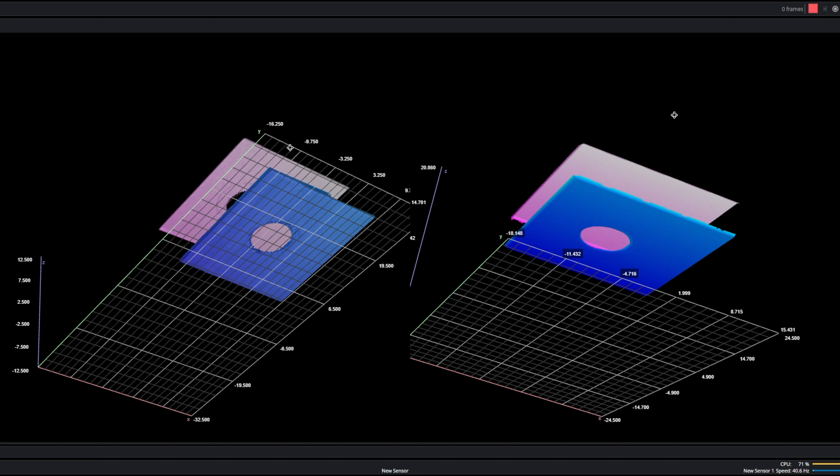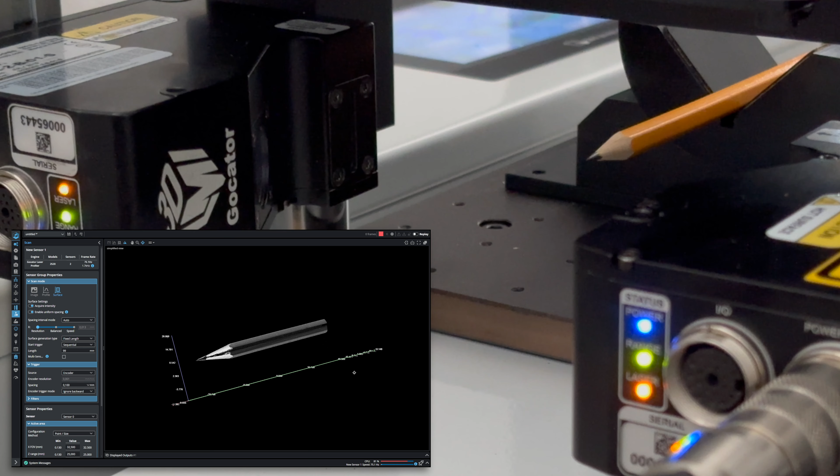In this video, we will explore the process of aligning two opposing Gocator laser line sensors in GoPxL. In an opposite layout, we have two sensors facing each other. When their measurement ranges intersect, we can effectively scan an object placed between them. This setup is commonly used for measuring sample thickness.

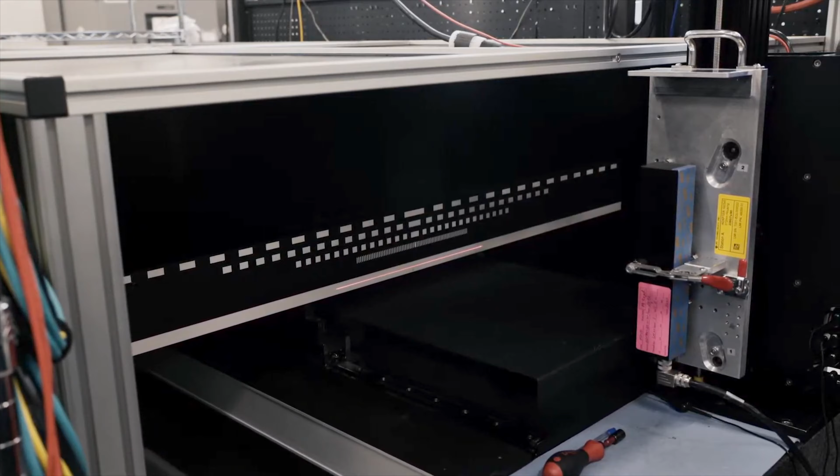It's worth mentioning that LMI Gocators come already calibrated from the factory, meaning users don't need to worry about calibrating them themselves. But when you are using more than one sensor, making sure they are aligned properly becomes really important. Essentially, alignment ensures that each sensor knows the precise position of the others. This way their individual scan data can be combined. I will demonstrate how to align two sensors using the moving bar alignment procedure.

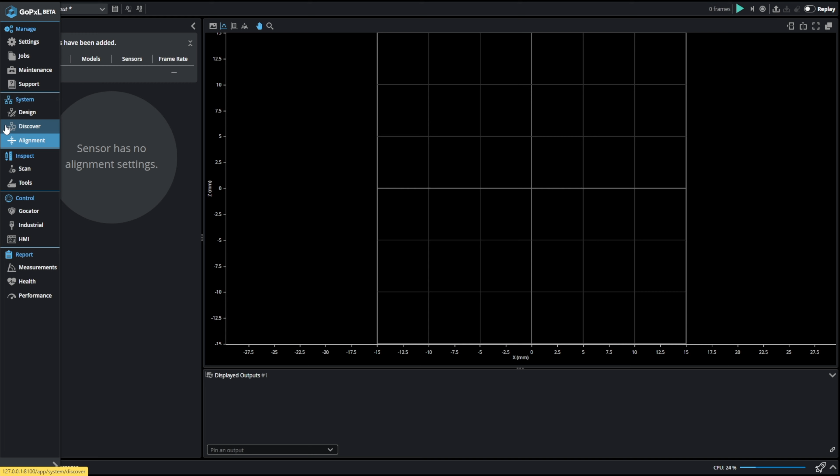Our first step is to add the two sensors to this GoPxL instance. When we click the Discover button, we can see that two sensors are available. If we click the Design button, we can add the two sensors by checking the checkboxes over here. Also, we want to be able to manage the sensor group layout, so I'm going to enable this one.

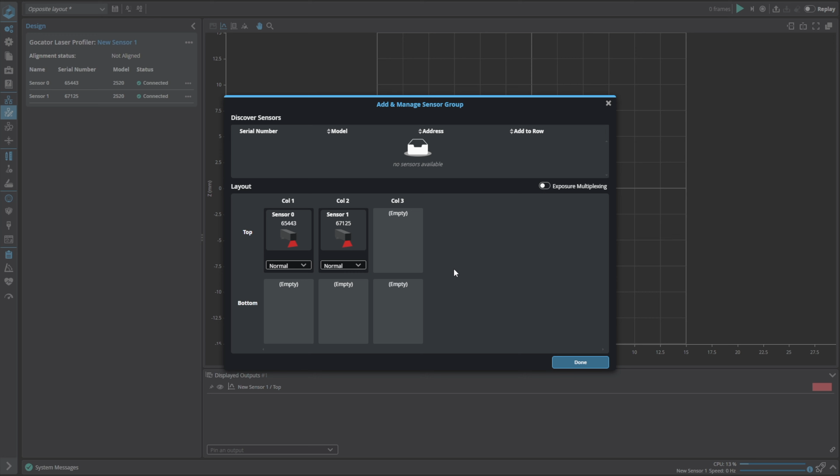By default, the sensors are set in wide mode. We want to have opposite mode. We can simply do this by dragging this sensor to the bottom row. Now simply press Done.

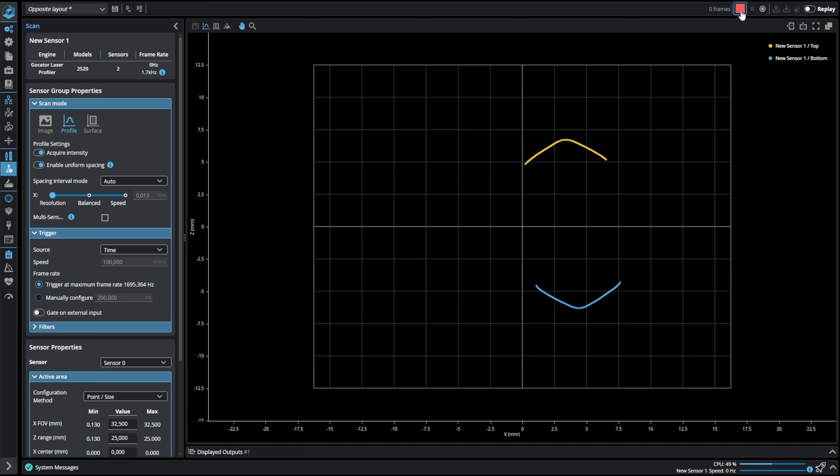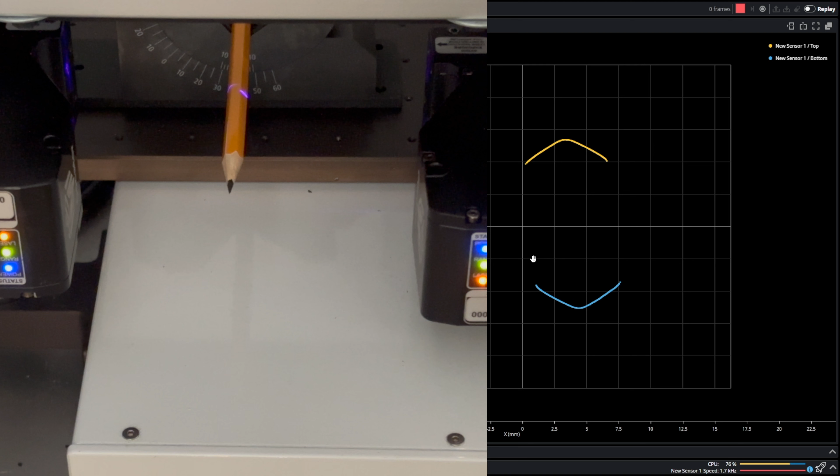Let's now make a simple profile scan of a pencil. Keep in mind that the alignment is not done yet. The colors indicate the different sensors. As you can clearly see, the gap between the profile lines is currently incorrect. Also, there seems to be a slight misalignment in X direction.

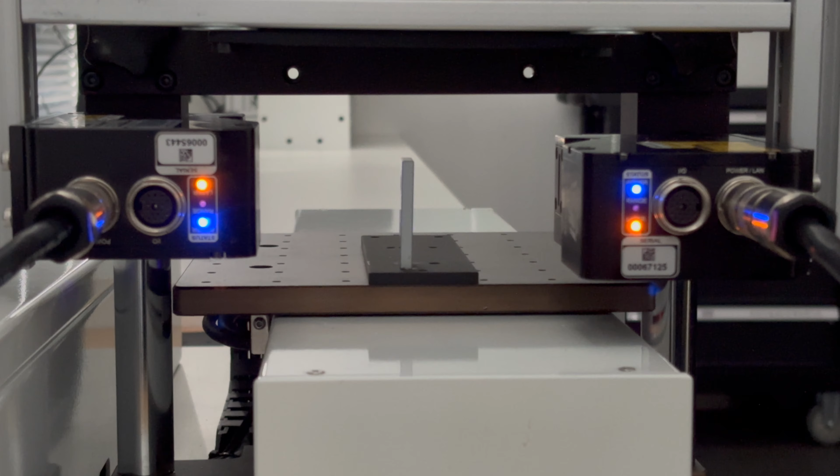This is the target that we are going to use for our alignment. Keep in mind that for this particular example we actually only need one hole. Let's now make a surface scan of the alignment target. The two holes are not aligned. And as you can see from the side view, the thickness isn't correct either.

It's now time to align the sensors. Click Alignment on the left and notice this indicator. It says Not Aligned. Also notice the sensor transform table for sensor 0 and sensor 1. All values are now 0.

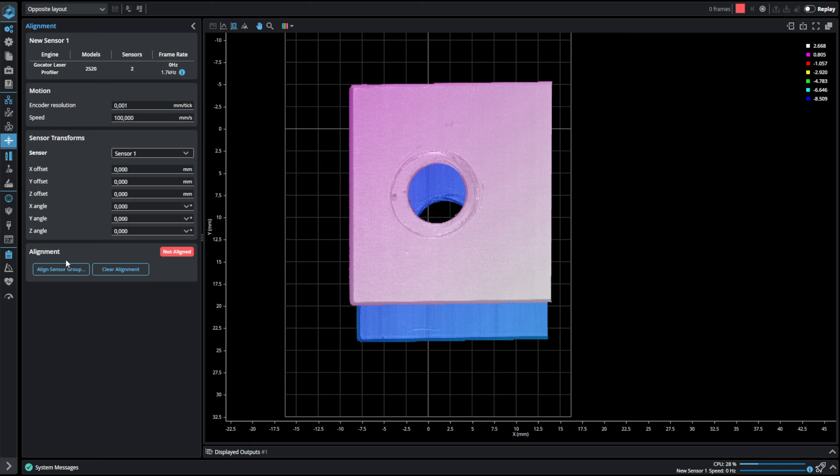Now click this button. Here you can set alignment type. In this case I'm going to choose moving. And target type, I'm going to choose bar. Then set these parameters. You can also choose the degrees of freedom. Now simply click Next and make a scan.

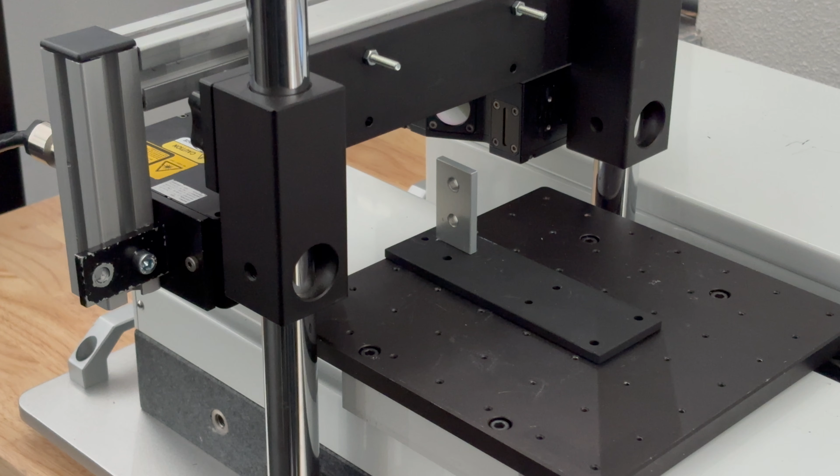The alignment is now complete. Click Done and you will see the indicator is indicating aligned. Also notice that the values are now non-zero for sensor 1 and sensor 0.

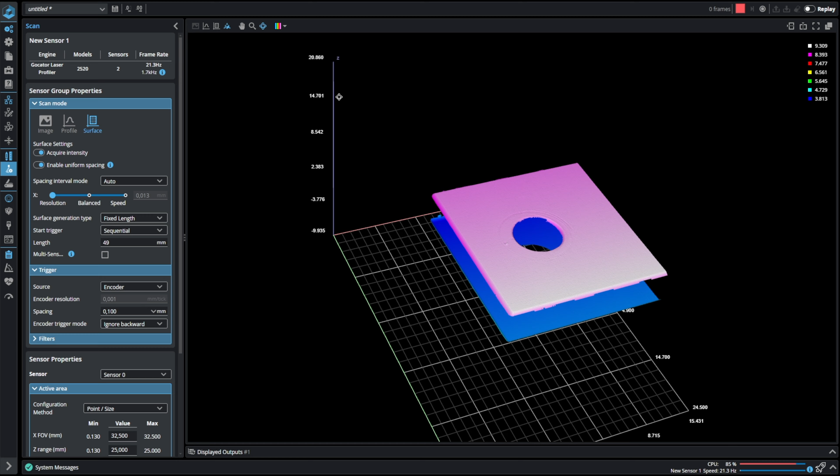Let's now make a surface scan of the alignment target to see if the alignment was done correctly. We can clearly see that the holes are now aligned. If we go to the side view, we see that the thickness of the alignment target matches the expectation.

Let's have a look at the pencil sample again and make a scan in profile mode. This looks much better than before, confirming again that the alignment was done correctly. Finally, now let's make a surface scan of the pencil.

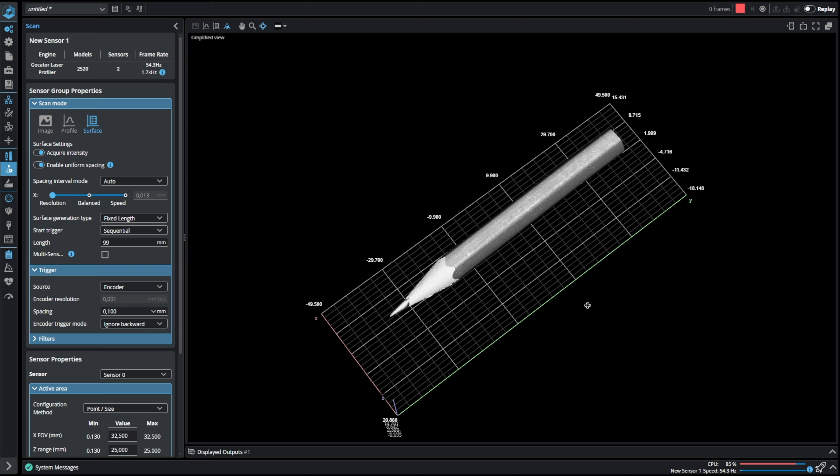We succeeded. Here is a nice 3D scan of a pencil using two Gocators in opposing layout. I hope you enjoyed this video.